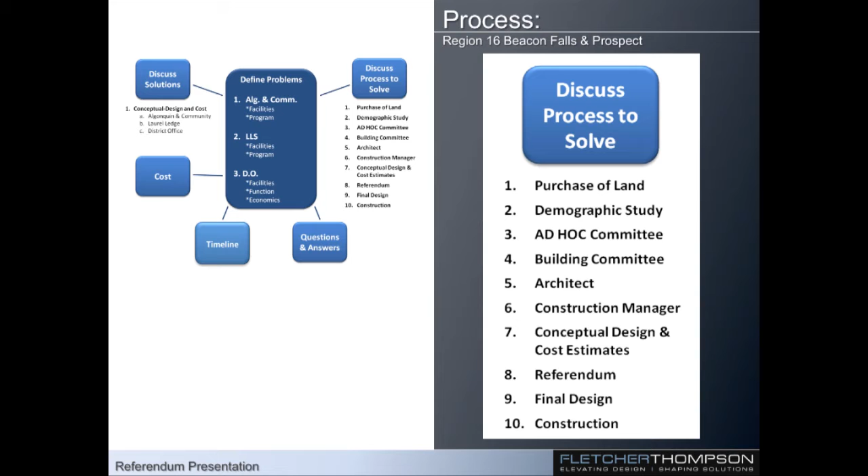We studied 4 different possibilities for a district office, and the solution I'm going to be reviewing with you was the most cost-effective avenue that we could take. Well, it's been a long process to get to where we are today with this referendum and the building project we're bringing forward.

It began 3 years ago, really, when we began studying the purchase of what was then called the Talmadge Hill property on Route 69, now known as 75 New Haven Road. That property is 47 acres. We purchased that property in anticipation of a building project.

The Board of Education then formed an ad hoc building committee to look at possible solutions to the problems I described earlier. The committee came up with 32 different possible combinations—all different arrangements of how to fix and address these three problems. For instance, there was lengthy discussion about using the middle school as an elementary school, pre-K to 5, and building a new middle school on that property. That solution was not deemed cost effective.

So with 32 possible combinations of solutions, the ad hoc committee made some recommendations: to build a new pre-K to 5 school on the Talmadge Hill Road property, now known as 75 New Haven Avenue or New Haven Road, and do connections at Laurel Ledge, and to take the Algonquin property left over after the project and convert that into a new district office.

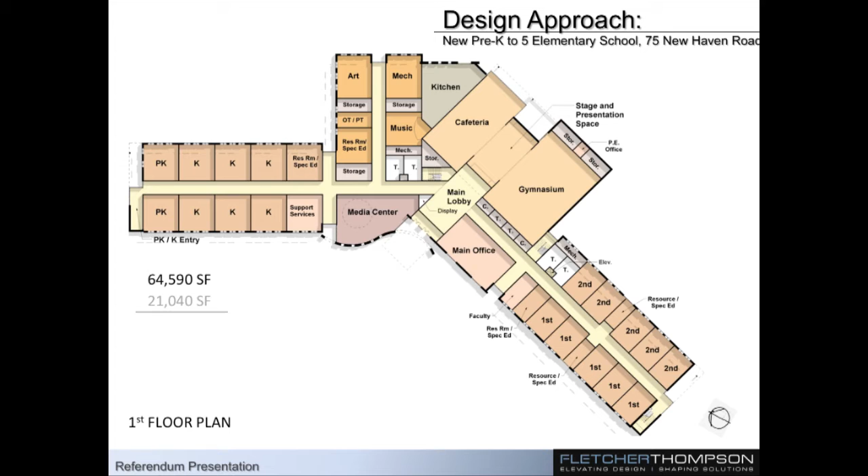So the kindergarten function remains in the kindergarten wing, and they migrate out to those core facilities. First and second grade does the same. Third, fourth, and fifth will do the same. And so there's very little crossover of the three distinct communities within the school.

We located the building in the very north corner of the property. This was very purposeful. The first layouts required far too much earth movement and too many costs associated with that. In addition, water and natural gas are located about 1,000 feet from the tip of this property, and so the closer we stay to that, the less earthworks we have to do to bring those utilities into the property.

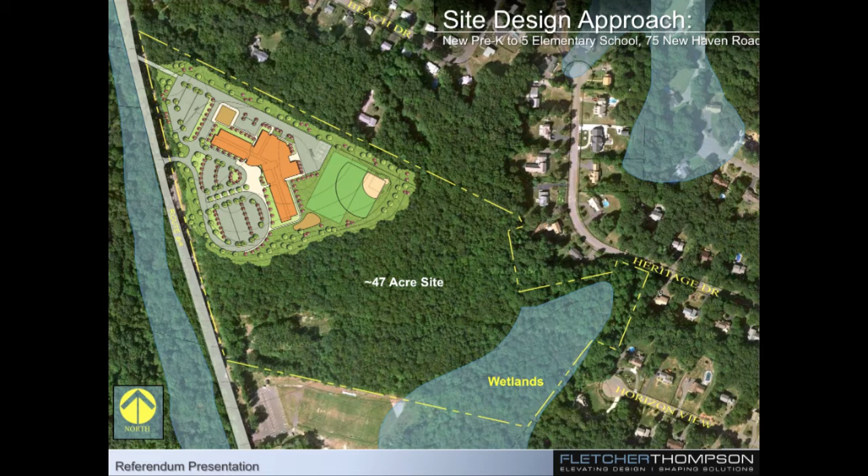This particular location also lends itself very nicely to access from Route 69. It's the flattest stretch along the west side of our property. It has the greatest sight lines as well.

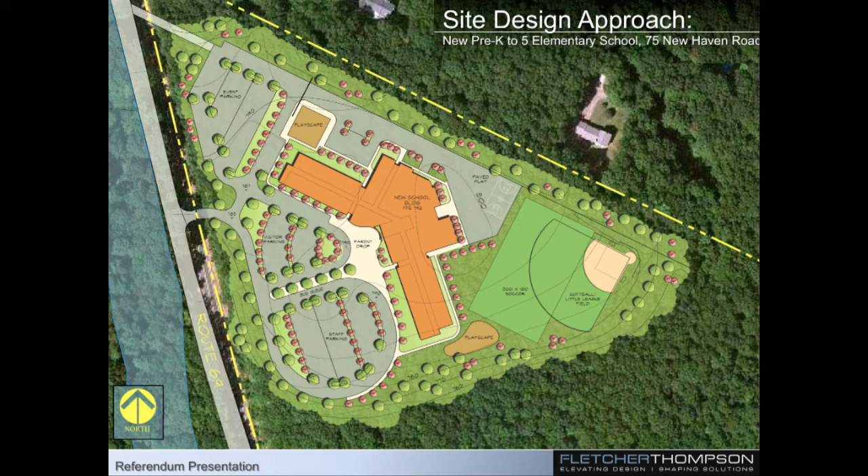If you look at the graphic there in front of you, you'll notice that there's extensive parking for this school. That was very purposeful in this process, and the reason for it is that there is no possibility for on-street parking for events at this particular school. All cars would have to come off of Route 69 for parent conferences, for open houses, for special events, and things of that nature that can be held at the school. So we built in 375 parking spaces for this facility.

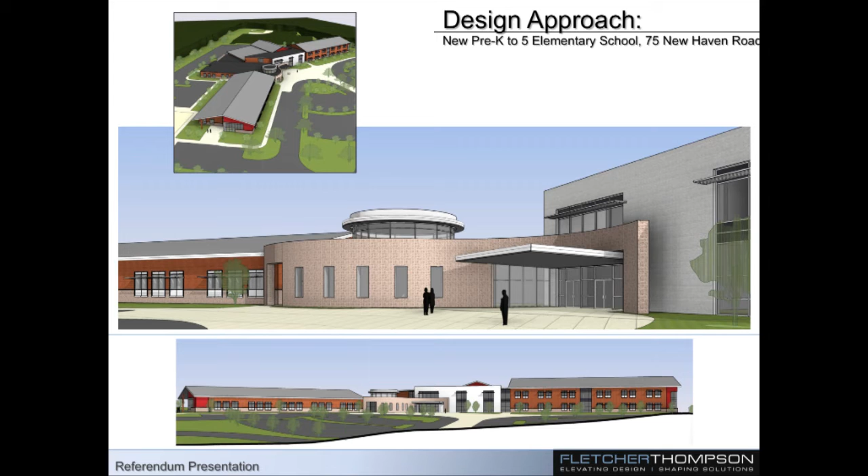In the lower elevation, you can see the kindergarten wing to the left and the grades 1 through 5 double-story wing to the right. One of the features that we built into the building was for easy expansion in the future. If needed, we could add classrooms to either ends of those chevrons.

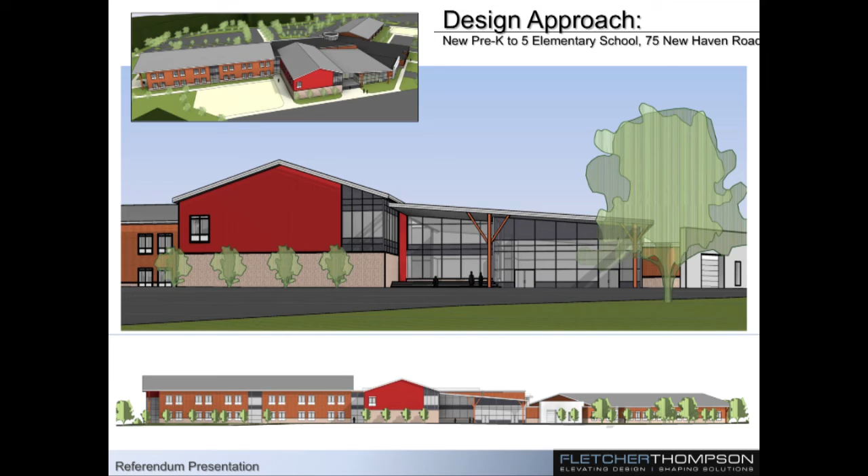We provide playscapes, hardscapes, and softscapes in this facility as well. The Laurel Ledge educational specification, we tried to achieve as much parity as we could between the Prospect side and the Beacon Falls side, so we're calling for the same kinds of amenities, the same kinds of classrooms, and the process, the form function process, again began with the educational specifications.

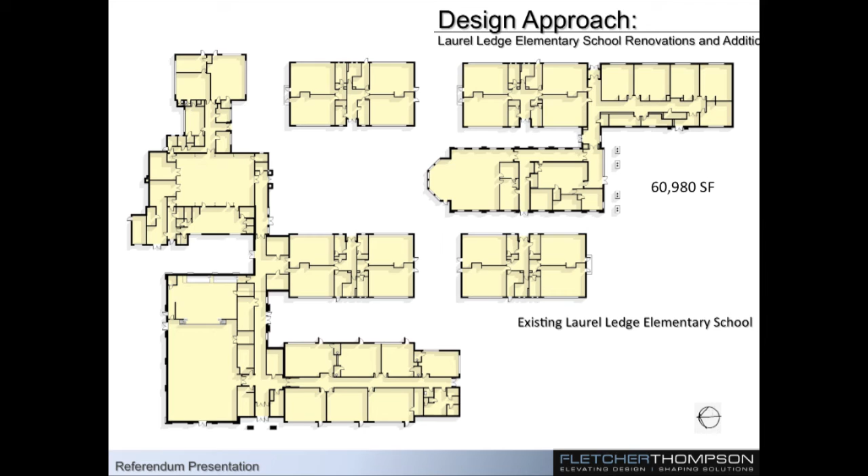The kitchen, you'll notice, has renovations. The cafeteria has some very light renovations to it. The acoustics in the cafeteria are terrible at this time; we'd like to do some acoustic work in there and update and modernize the kitchen facility as well.

The entire structure will be impacted, however, during construction. There will be painting and cleaning, fixing fascia boards, cleaning brick, and repairing gutters, that type of thing, in addition to adding air conditioning, as we have air conditioning in the Prospect side schools as well. That's the essence of the building project there in terms of the school facility.

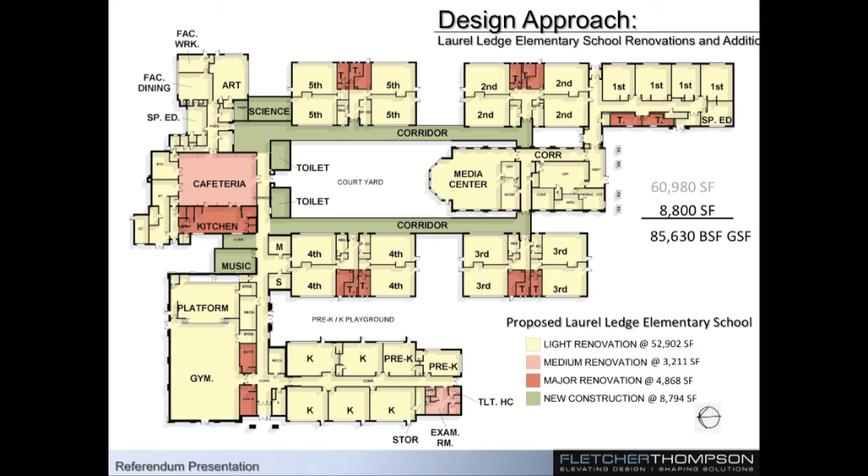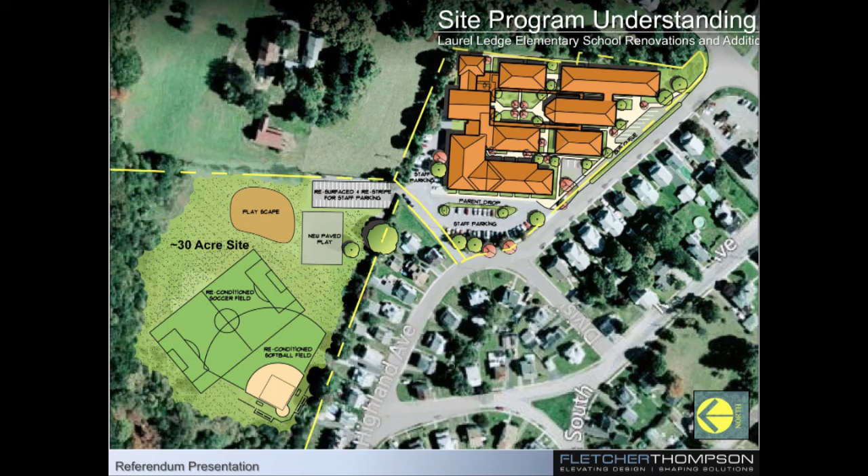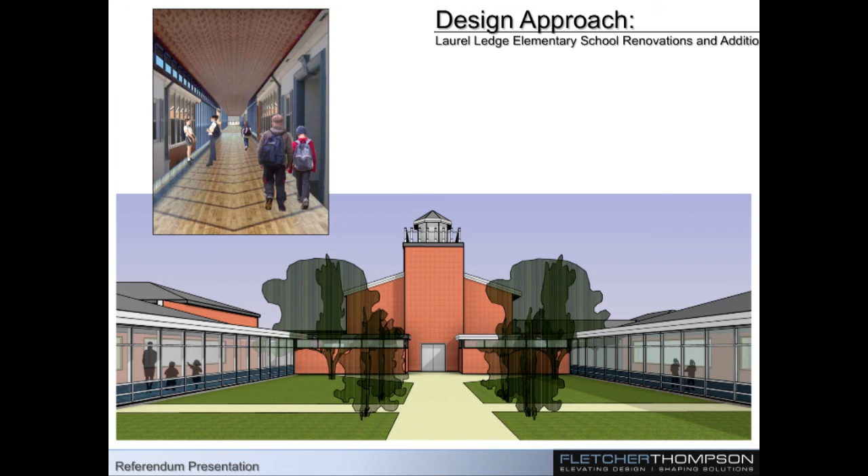For the district office, again, it's not quite an educational specification, but it is a specification of the spaces that are required. We went through that process and handed it off to the architects and the construction company to look at and evaluate. The solution we've come up with, we studied four solutions very specifically, and this solution was the most cost-effective. Here's how it came about.

The Board of Education originally envisioned that when these projects were completed, the community school and Algonquin school properties would be liquidated, sold essentially, and the refunds returned to the taxpayers of the district. However, we discovered in the process that the deed transferring the property that Algonquin is on to the district had a clause saying the property could only be used for educational, recreational, or town office purposes. We recognized immediately that the marketability of that property was not as strong as we had originally intended or hoped.

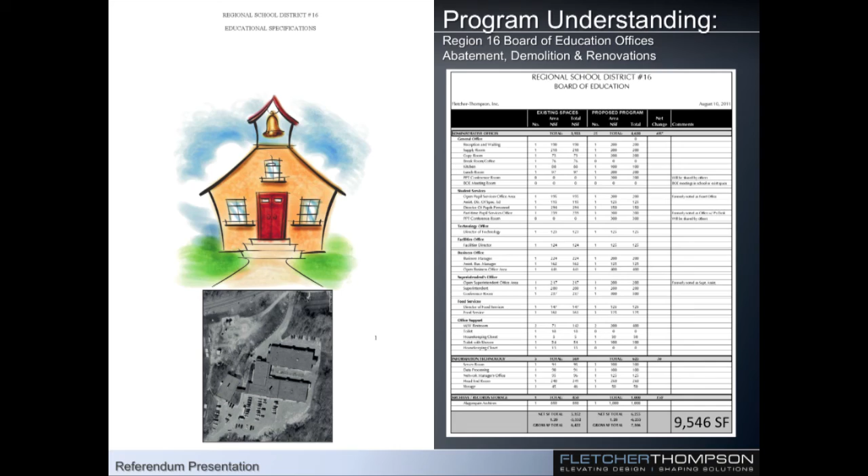So we began to look at whether we should hold that property and take advantage of the structure that's there. The Algonquin School was built in two parts: the main hallway by the administrative offices was done in the early 1950s, and the two-story addition was added in the early 1960s. What we thought was to take the best of what that building has to offer, which is actually the older portion of the building.

Demolish the two-story wing and fill the hole. It's an easy place to make a break in the building, because that's where the second building was actually added on in the first place. Then take the front wing and do very light renovations to it to use the facility as our district offices.

We're talking about putting in more energy efficient glass, cleaning, painting, retrofitting some of the toilet spaces, and then light renovations throughout, putting up some interior walls to sequester workspaces. But in essence, not doing much to the building, keeping it as minimal as possible.

The kindergarten annex that's currently in use, we would like to just retain that space as there may be an opportunity in the future to use it as an educational space if the need ever arises, but not to touch that in this project.

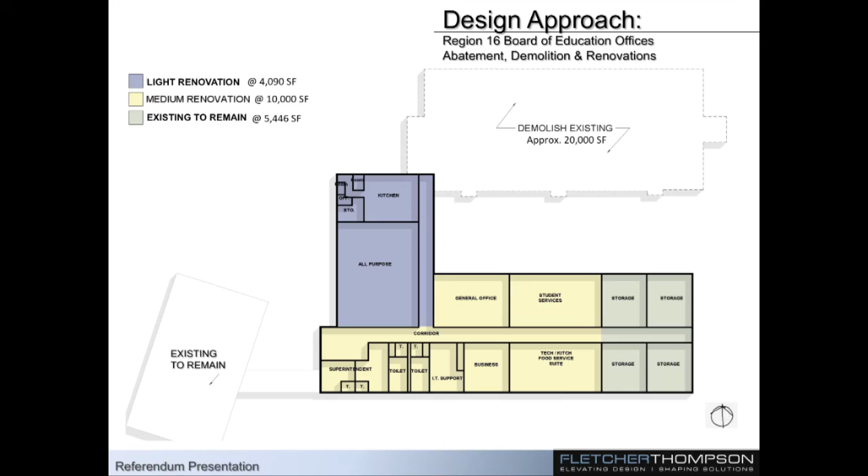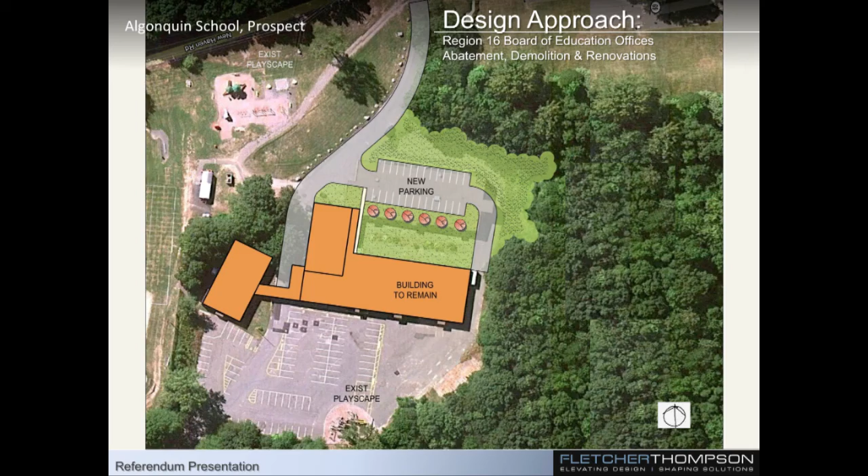So that brings us to what do the projects cost? First, let's look at the new school and what the estimates are. The new elementary school estimated gross cost would be $36,608,000. The net cost to the district, after we take advantage of the 68% reimbursement rate, would be $13,911,000.

Laurel Ledge, the estimated gross cost would be $7,746,000. And again, taking advantage of the reimbursable components of that project, we estimate the project will cost...

$4,260,000 to the district. District offices, estimated gross cost of $2,371,000, with a net cost to the district after reimbursables of $1,553,000. So you can see that taking advantage of the reimbursable components of the projects...

Our estimated gross cost for all of the projects is $46,725,000. Actually the net cost to Region 16 would be $19,724,000 in round numbers. The estimated cost to Beacon Falls for that would be $7,889,000, and the estimated cost to Prospect would be $11,834,000.